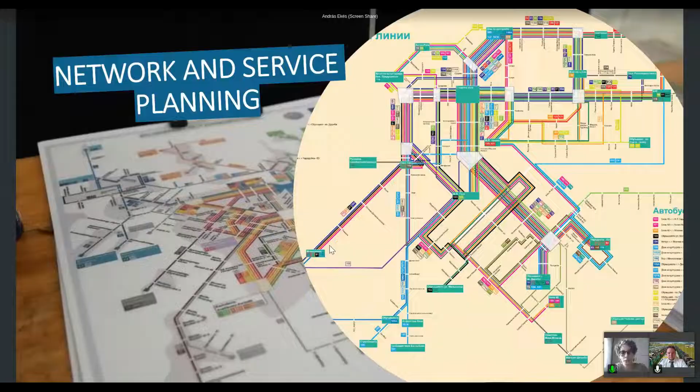There are a couple of reasons why the railway infrastructure is completely different from the situation that appeared in the latest decades or during the beginning of the 20th century, because there were a lot of big railway yards, switching yards, and big railway stations built for steam engine and later electric locomotive technologies, and it changed a lot.

There are more and more modern motor units, electric or diesel, needing less space. You don't have to go around the train when it arrives, so you don't have to uncouple and couple the locomotive. And also at a railway station, you need to spend much less time.

So that's one reason. The other reason is that freight traffic has changed a lot. There are more and more direct freight trains from, let's say, Rotterdam Harbor to the Central European big switching yards, but you need less of the partial freight train services from one station to another, because it's more and more used, unfortunately, by road freight traffic.

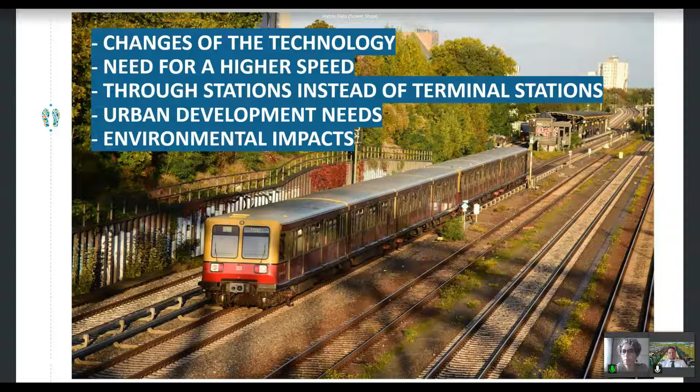Okay, thank you. That was a very useful introduction for us all, coming from different fields. Could you please show us a few good and bad examples of reuse where the railway is still involved? So it's not a different type of use, it's a use where mobility is involved, but it shows the future.

Yeah, thank you, Hanna. I will show you some good examples and other types of examples about railway-based regeneration, or not regeneration still. The first group will be the harmony of mobility and spatial development.

If you remember the Vienna Südbahnhof, the former southern railway station, it was a classic end station of regional and some intercity trains. It was a unique railway station in Europe, with a rectangular, 90-degree location of two railway stations in the same place. But you couldn't go through, only for technical purposes, so trains had to stop there and go back to the southern part of Vienna, and to Graz, or to Bratislava and Győr in Hungary, for example.

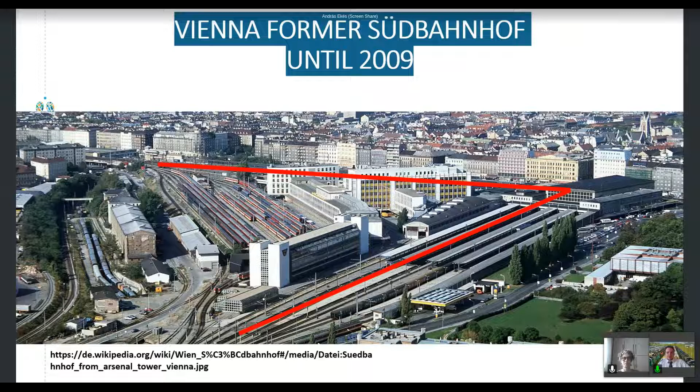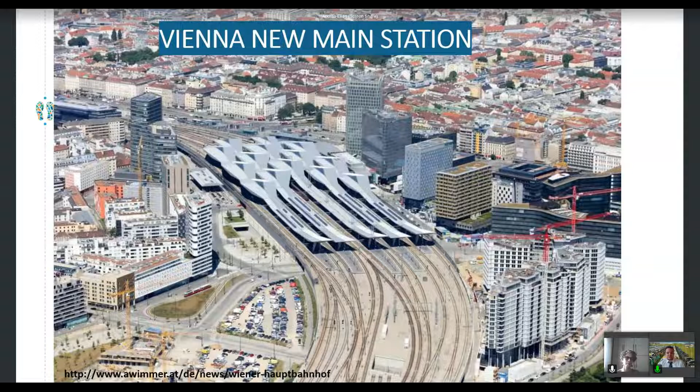It was a very obsolete area of the city of Vienna, and it was decided in the early 2000s to create a new through main station. It was opened by the end of 2012 at the change of the European timetable. It is now one of the best solutions for creating a through railway station combined with urban development, with 20,000 workspaces and a couple of thousand new housing possibilities, new flats. It's now a new center of the city of Vienna, a very modern and passenger-friendly solution for renewing railway functions.

Another example is between Munich main station in Germany and the station Pasing. You have 5 different stops of the S-Bahn between Pasing and Munich main station. During these 60 hectares, there are around 15,000 new workspaces and 7,500 new flats for inhabitants.

And it's an absolutely innovative and attractive area, because the Deutsche Bahn needs much less space in the city of Munich than it needed before.

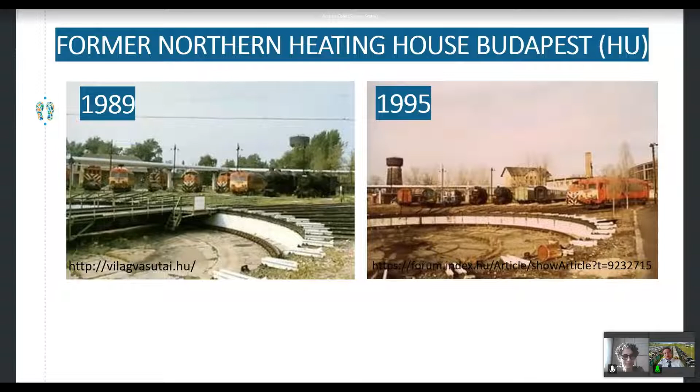A Hungarian example: there was the former Northern Heating House in Budapest. This was the first one in the city, but after many decades, before the 2000s, it was almost closed down. Only some locomotives were stocked here without any function. Within 2 years of preparation and implementation, a new railway history park was opened, which is one of the most famous railway history locations in Budapest, and it's very popular and growing, using the former railway tracks.

I will show a completely different solution. You have a very important international railway corridor at the seaside of the Mediterranean Sea between Marseille, Nice and Genova, and between Ospedaletti in Italy and San Lorenzo al Mare through Sanremo. The railway was put in a tunnel to have higher speed, because now it's a straight line in a tunnel. You cannot see the sea from the trains, but the speed is much higher.

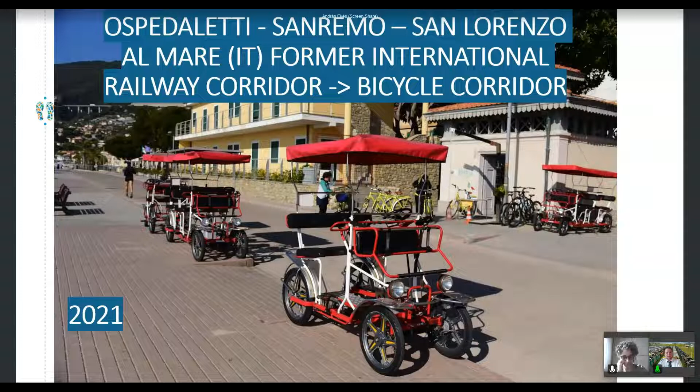And on the former railway tracks, you have a very good cyclist corridor, one of the best ones. You can go with your bicycle, or rent a bike through different settlements - Ospedaletti, Sanremo, Santo Stefano al Mare, and San Lorenzo al Mare - and enjoy the Mediterranean Sea. You can also go through a big and long tunnel.

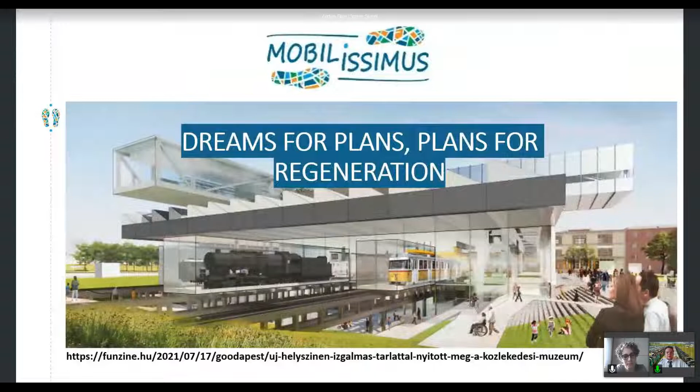There are some dreams for plans and plans for regeneration. This is the second group. There was a former Northern Railway repairing works - not what I showed before, a different location in Budapest.

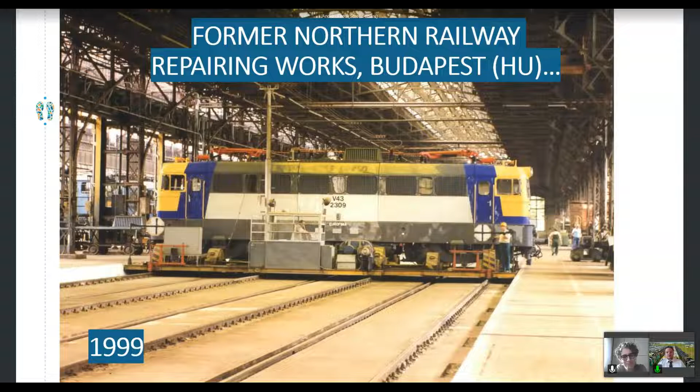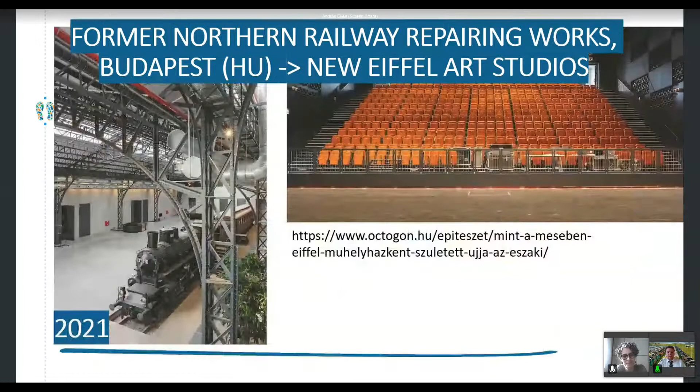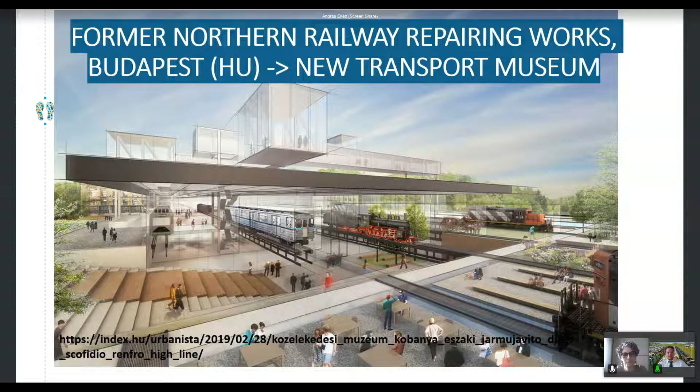That means there is a new Eiffel Art Studio on the place of the formerly closed railway area. There will also be a new transport museum at this location, but this is under planning, and there is actually a temporary exhibition for those people interested in urban and railway transport.

The last category, I would say, is where time was slowing down, so almost nothing happened. One example is Sotteville-Rouen in France, close to the city of Rouen, where SNCF, the French railway company, regroups all locomotives not used anymore, and they are demolished time to time. This was a previous big railway switching yard.

A very similar example is the Rákosrendező railway station in Budapest, which was a very heavy freight traffic switching yard until the 1990s. After that, there was a very unused period for this railway station, because the freight directions changed completely, but nothing happened with the renewal of the buildings and the tracks.

But there are plans how to renew it and give similar functions to those I showed for the Munich main station and surrounding area. Only at the edges of this area, some new housing investments have appeared, which I would consider as the first signs of a revaluation of this urban area. Thank you very much for your attention.

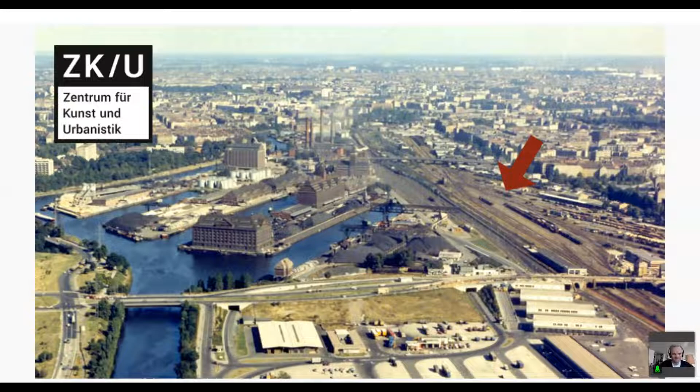And as András already mentioned, the nature of transport has changed over the years, and now most goods are transported into the city of Berlin through trucks and lorries and distributed more individually into the city. When we came across the station, through a public tender in 2009, it pretty much looked like this.

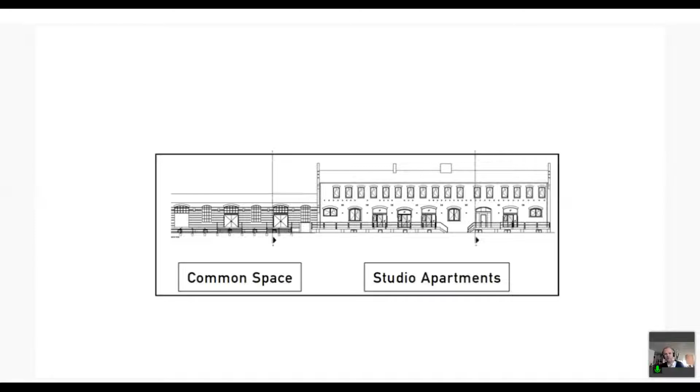So we have this division of projects which we run throughout the former cargo station. Once a project has become a more stable unit, it becomes a format. Over the years, we've created quite a lot of formats, which are reliable events where the neighborhood and local public know this is going to happen once a week, once a month, and so on.

What we try to do is activate our local potentials, because we are located right here adjacent to this residential area that I mentioned earlier. It is a sort of former proletarian industrial area, and still today it is looked at as a social place with social conflicts.

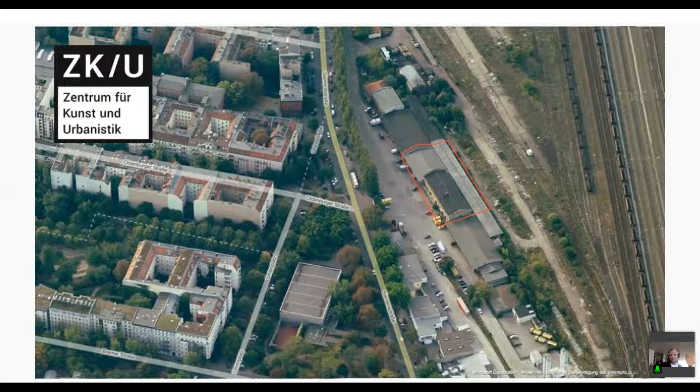So we try to create a forum where different people can come together and social conflicts can be looked at and tackled in our space. We try to create opportunities for people to come in touch with one another and with us.

At the end of the day, what we try to do is strengthen our neighborhood by bringing people together, also through local public dining evenings, and by creating a nice park. Our park is actually heavily used, as you can see on the left side. But it's part of our responsibility to look after this public asset.

Now I want to talk briefly about the ownership and how it legally works. I have an aerial view to explain that. From the top, you can see there's the building and a surrounding public park. The public park is still in public hands.

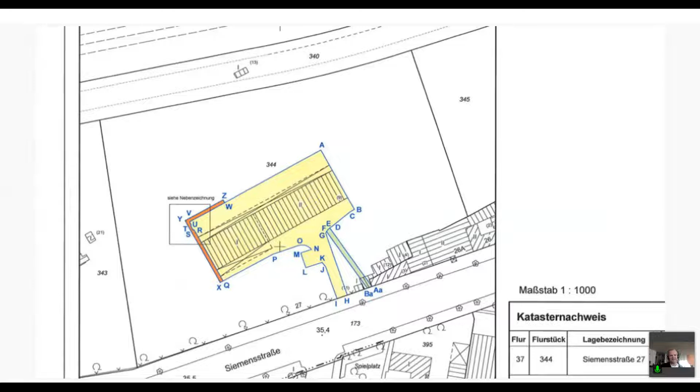I have here from the registry a map where the yellow parts are those that belong to our non-for-profit organization, which I'm heading as director. For this part, we have a heritable building right. Now I want to explain what a heritable building right is.

It divides up the ownership. The buildings are property of our organization, whereas the land that the building stands on is still in the ownership of our local district, still in public ownership. So this is divided, and we have a 40-year lease that allows us to plan far ahead and invest in the building.

After these 40 years, we will renegotiate the contract with the local municipality. So once again, the division of the building from the land is one characteristic of a heritable building right.

We pay a monthly interest, which is evaluated by looking at the value of the land. We pay around 3 to 6, usually 3 to 6.5%, on the value of the land, which is re-evaluated every 5 years in a public process.

So for ZKU, we pay around 1,500 euros per month, which is incredibly cheap because we have cultural use and have a rather low interest that we pay for the land.

Now, the good thing about a heritable building right is that we can be obliged through the contract with the public district to do specific things, in our case cultural and social activities. If we decided to run a commercial business overnight, we would not be fulfilling our contract, and the building would fall back into the hands of the municipality.

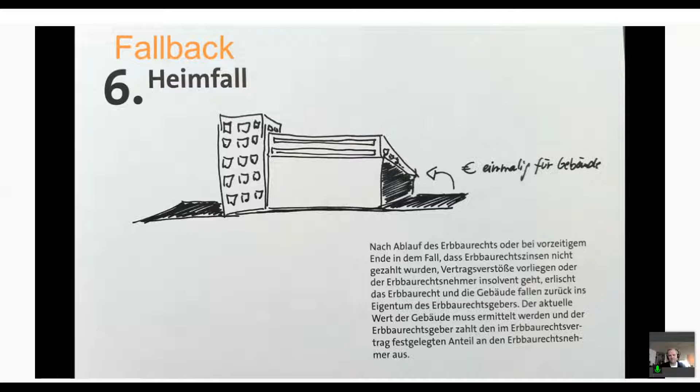What I like about this kind of contract is it divides the power between the public hand and us as a non-profit, but still private, organization.

And we have a long-term perspective, 40 years, that we can invest our time and money into that building. We know we won't have to leave after 5 years, as a normal rental contract would have run out.

And for the city, after 40 years, it can still make decisions on what shall happen on that land. So for both sides, I think it's a good situation.

Now, just very briefly, a look into how we finance all this. It's incredibly complex, but I'll explain it briefly. Mostly our program or the house is run by funding, usually project-related funding, which comes from the EU, our federal government, and regional and local sources.

And we run our residency program with different partners. We have income through renting out the space on rather long-term contracts, which creates a stable income. All these financial income sources enable us to run projects and to fund and subsidize residencies for artists coming to our place.

We also run a bar, which creates some income, but not very substantially. It's mostly a service we offer to be attractive to our local public. And we run our regular formats that I showed you earlier, Fußballer, Gütermarkt, and things that are good for our local public.

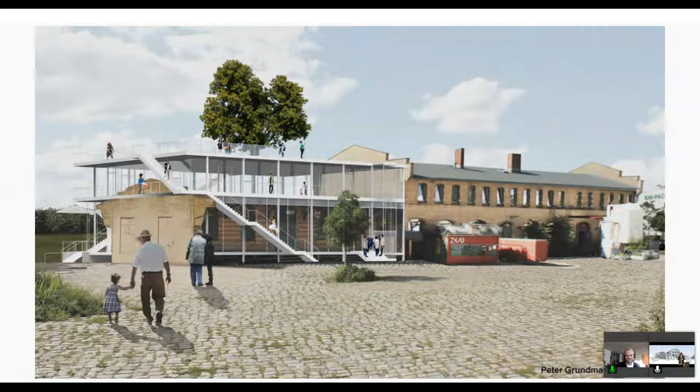For that, we were able to obtain EU and regional funding to create an energetic construction around the existing building. So we try to maintain the character of that cargo station and still modernize it, as you can see in these slides. And that's pretty much all I have to say at this moment.

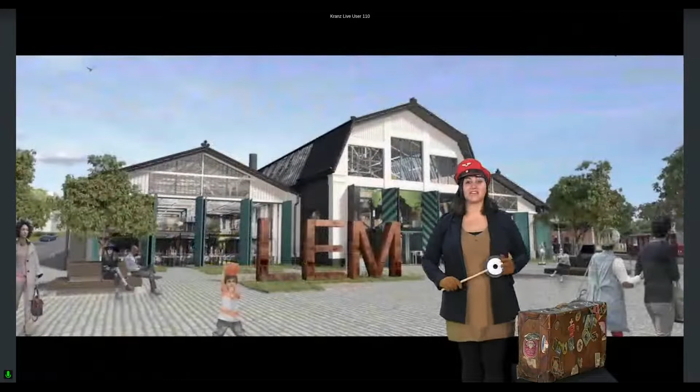We have to continue our journey to the east and visit Ukraine. Our next stop is Lem Station in Lviv, where we will meet Gregory Zarkhin, a project manager of an emerging hub of creativity and innovation, aiming to make change and create opportunities. Let's see how Lem Station is becoming a place for local enterprising community to flourish. This project is rather in an early stage, so it will be interesting to contrast it with the long-year experience of ZKU. Gregory, welcome. The floor is yours.

Okay, one second. Let me put the screen on.

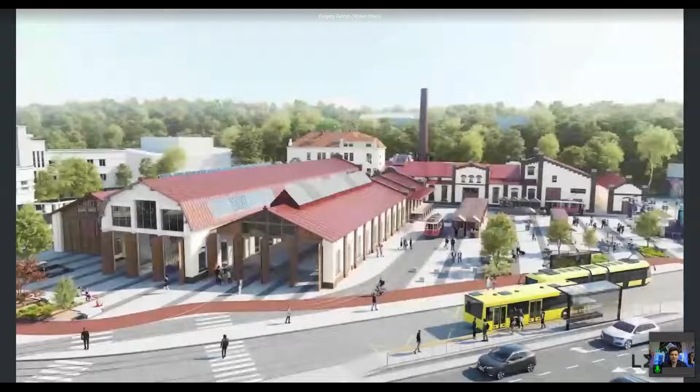Hello everybody, thanks for the great introduction. I would like to showcase Lem Station, a creative innovative hub in Lviv. This is the more modern visualization that we've created. It is a former tram depot located in the city center of Lviv, and it is the oldest and first tram depot in the city.

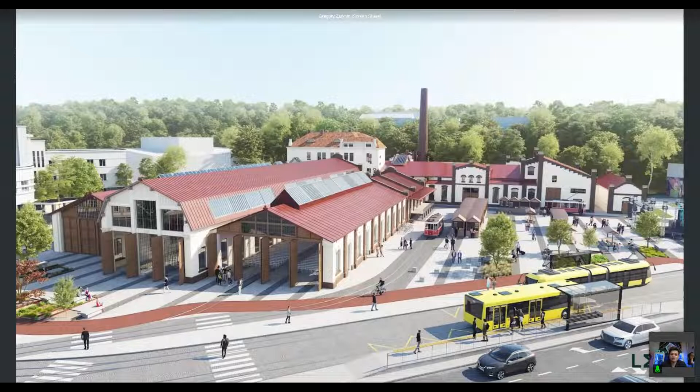It's important to know a little bit of the historical context of the building. The history started in 1894 with the Krajowa Expo, which was supposed to host 1 million people over a year's time span, while the capacity of the city was 200,000 citizens. Thus, a decision to create railway transportation arose. The Siemens and Halske company won a tender for the tram transportation, and in 1894 they built the first hangar on the left top building, and started the electrification of the power plant of the location.

In 1906, the hangar on the right also arose, and then in 1926 they were merged with the passage type of hangar, joining and filling in the whole picture. In the 1980s, it was a very vibrant location already on the outskirts of the city center, bursting with life and a lot of trams.

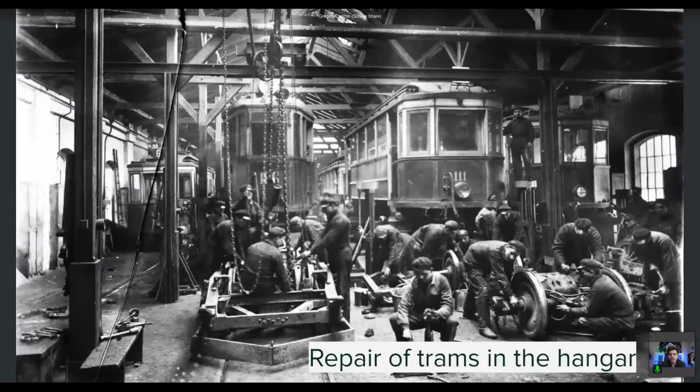It's interesting to see the picture from the 1920s and compare it to how it looked in 2016 when we received the location. The project actually started in 2015 after a group of independent businessmen decided to push the government a little bit towards creative economics and creative businesses. They introduced the Lem Station project on an open tender and won the tender for renovation of the location.

Just months later, in December 2016, this is how the location looked. We were preparing for the Lviv Mozart classical music concert, one of the biggest in Ukraine, and the work that was done was actually colossal. I'd like to showcase a little bit of that in the video right now.

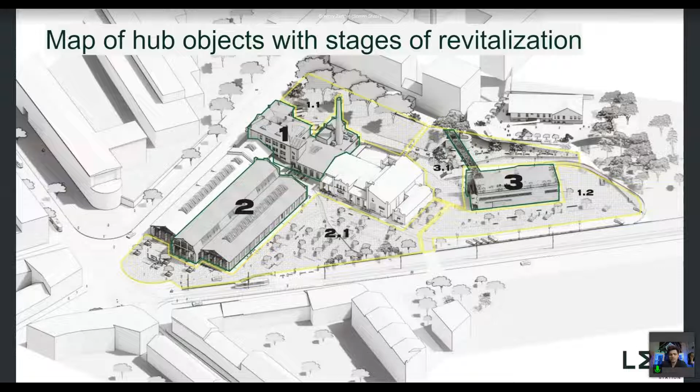In the revitalization process, we divided it into 3 phases. This is how it's marked on the location, a little more in depth. First is the Ion Tykhyi Square and the co-working space, a 3-story co-working space that we are also operators of.

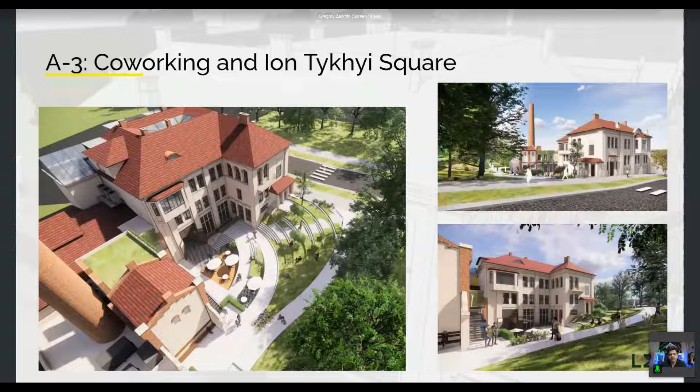There's also going to be a restaurant with some of our investors as operators, and a couple of stores with local products, goods and services. This is the co-working interior concept.

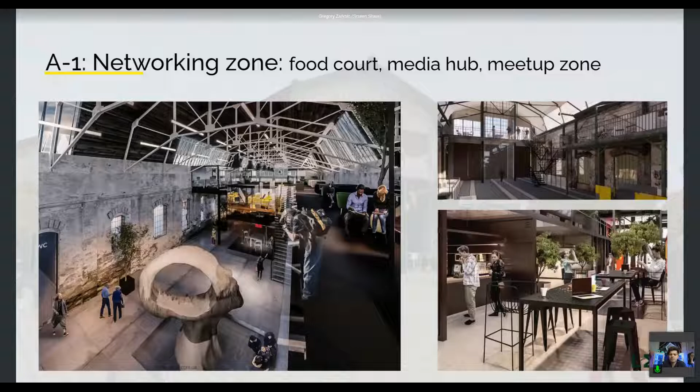Here is the networking zone, and this is the central hangar, where the food court, media hub, and meetup zone are going to take place. Next is the event hall in the right hangar with a 400-person seating capacity for various events, mainly culture, business, classical music, or jazz music.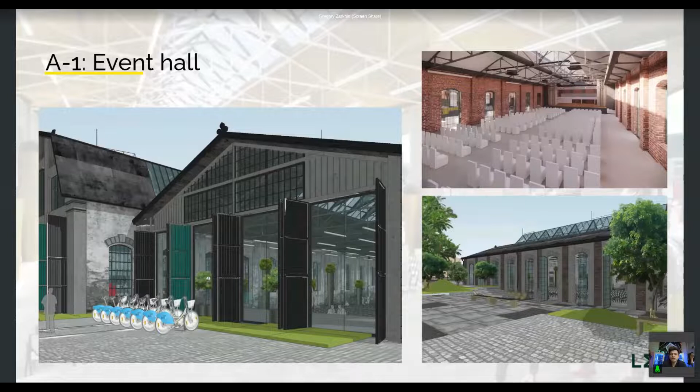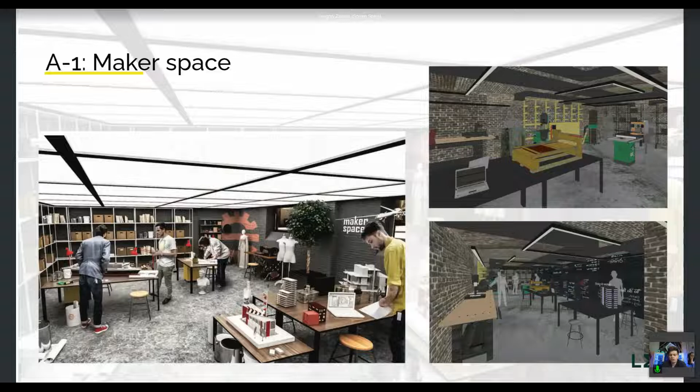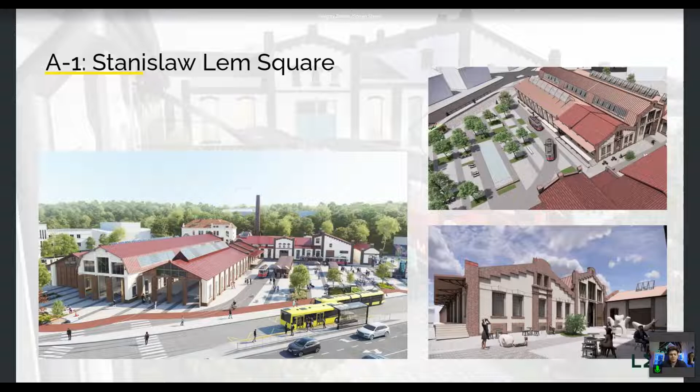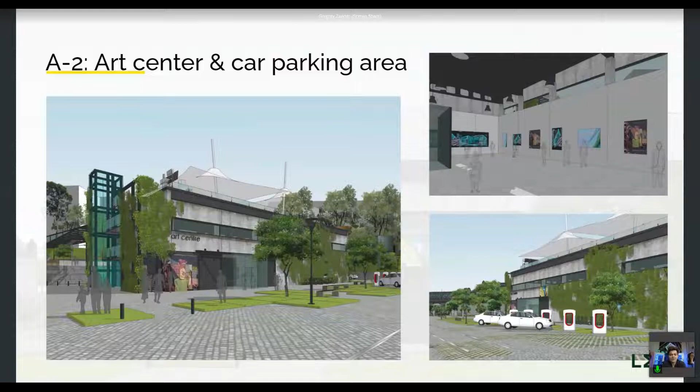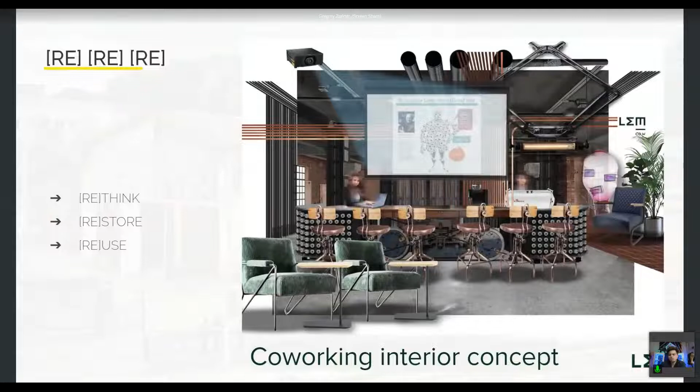The concept of rethink, restore, and reuse is very important for us. Here, in one of the interior concepts, you can see that we're trying to reuse the old items we found on the location, keeping the authenticity and finding new meanings for the items.

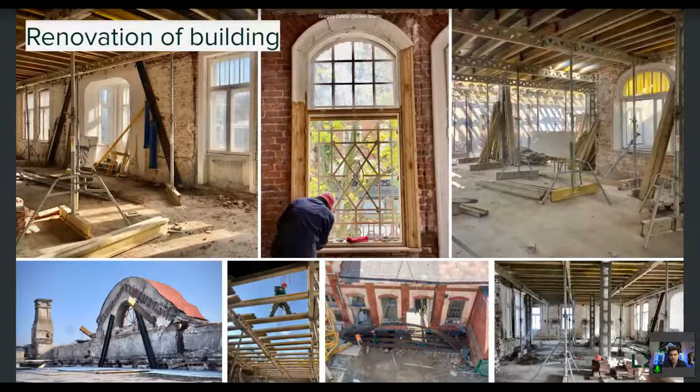We've created our own restoration department with our maker residents in the compressor station, where at the moment they're restoring old gates, doors, and windows. In general, the authenticity of the building's look is very important for us, and a fair share of the work is in the renovation process, trying to keep it as authentic as possible while also embracing innovation as much as we can.

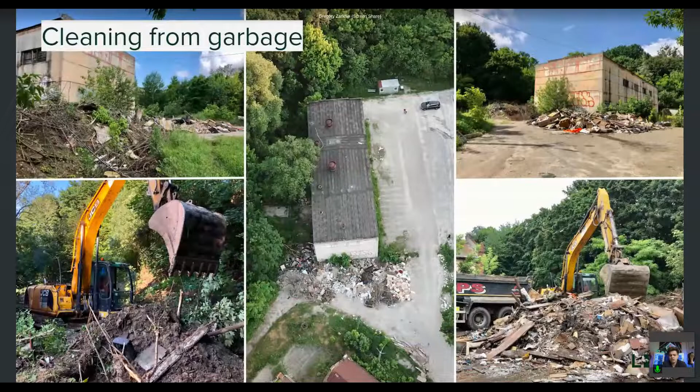We cleaned the location of over 1,000 tons of garbage over the past years, and as is often the case, we found over 1,000 artifacts in that garbage as well. All of those artifacts are preserved, numbered, and now we're working with designers and architects trying to find either new purposes for those items or use them with the same purposes as they were used before.

Events are a huge part of our location. Just as now the central hangar and right hangar got closed for reconstruction, we had our last event at the current stage. All of the events till now were free events, we didn't charge anything. We had over 70,000 people going through our doors with 60 distinct events. Those are normally inclusivity events, cultural events, theatrical, art and science, jazz and classical music concerts, and also gastronomy.

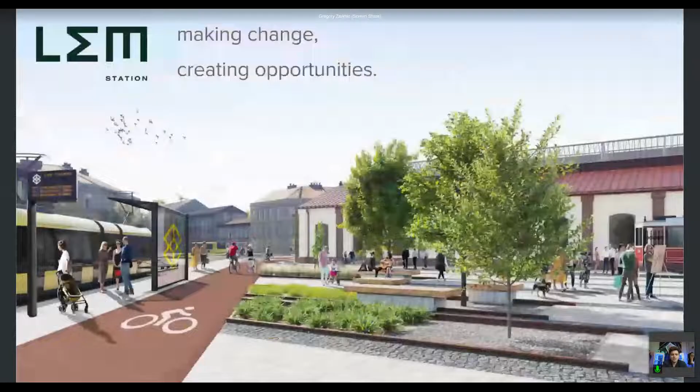Without the right for purchase, for 50 years of time. It's a pretty unique type of collaboration between the city council and the private investors. It's nice to see that those kind of initiatives are building up in the city. So thank you very much.

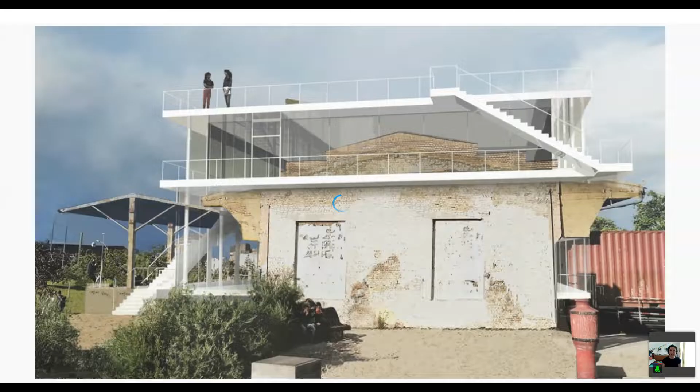Good morning, everybody. Hello, ladies and gentlemen. I'm glad I have the opportunity to present our cultural venue, the unique railway carriage theatre, Treno sto Rouf. Let me share my screen. Can you see me?

The famous 19th century fiction novelist Jules Verne heralded in his novels the most amazing inventions of the 20th century, including a theatre wagon of a train set in his famous book Around the World in 80 Days. More than a century later, in 1997, the train theatre was created by well-known Greek actress and director Tatiana Ligari. She ventured to realize her original idea to stage a theatrical play in a site-specific manner, namely inside an actual train wagon. She collected and restored old wagons and made them into a home for original artistic productions, dining and recreation. In this way, an innovative boutique railway cultural venue came to life inside vintage carriages.

Treno sto Rouf, which means the train at Rouf, is situated at one of the platforms of the railway station of Rouf. It's an area in the center of Athens, a few minutes away from the crowded Gazi entertainment district. The railway carriage theatre Treno sto Rouf is an actual full-length vintage train. It consists of 10 restored antique cars, which constitute evidence of contemporary Greek history and industrial heritage. They are now home to a theatre stage, a music stage, a restaurant, a bar, a foyer, dressing rooms, and utility rooms, where all kinds of cultural events take place.

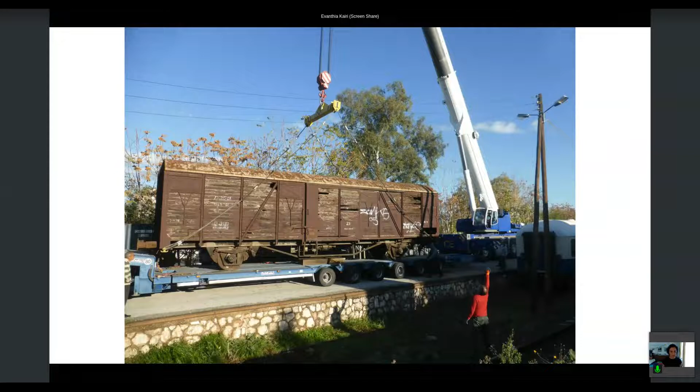24 years ago, Mrs. Ligari, a proven train lover, recognized the historical and aesthetic value of these old carriages, which lay abandoned in train scrapyards, and brought them back to life. A lot of work was done to preserve them. With great respect for authenticity and originality, the carriages were refurbished and transported to Rouf railway station, where they were transformed into a cultural venue - the first and only train theatre. Each carriage has its own history and origin, and is a multifunctional cultural venue in itself.

The train is led by a powerful Breda locomotive, an Italian technological achievement of its time. A rare piece of machinery and a listed monument, it is one of only 20 ever made, manufactured in 1953 to be given as war compensation to Greece after World War II.

Our jewel is an authentic wagon restaurant of the celebrated Orient Express, in particular of the Simplon route. One of the few remaining examples of its type, and also a listed monument, it was constructed in 1926 and is known as the Greek wagon. Having both historical and aesthetic value, it is steeped in the atmosphere of that legendary era. Nowadays it is home to our little music stage, so we call it the music wagon.

Only 33 guests each time have the chance to experience a unique evening, with original music performances, art events, theme nights, and romantic dinners held here.

Following this is an old wooden Bulgarian cargo car from the 1960s. Nowadays it's the wagon bar, which serves as the foyer and reception area.

Next comes the wagon restaurant, a restored Italian mid-war dining car. Guests can enjoy dinner in the romantic atmosphere of a bygone era, and also visit the art installations, exhibitions, and innovative artistic events held here.